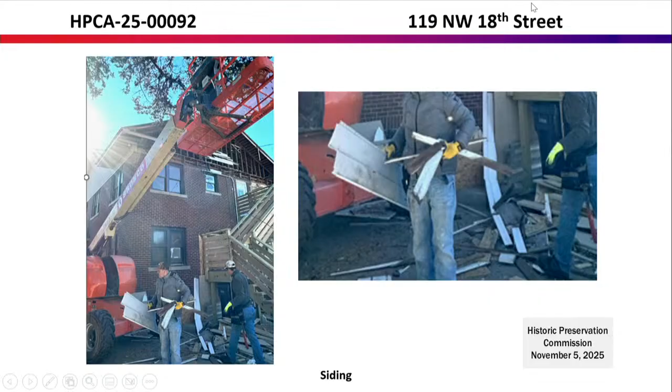Angela, correct me if I'm wrong. I think we have what we need as far as what they are requesting. It's just that it's not a product that the guidelines support. Okay.

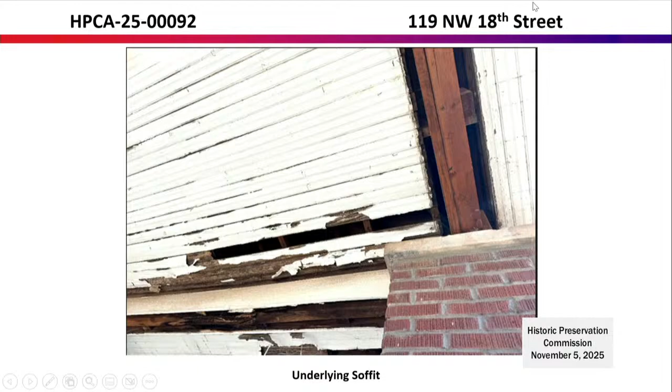If I could speak, Shelley Taft, same address. Initially we didn't have the photographs of the underlying material, and we obtained those from our contractor, and a different product was used. We did supply some photographs of our neighbor's home, opposed to our gables in the same photograph. We just feel like what was used was compatible and similar. At the time, because of the whole CA process, we did not know what could be used, but I feel like from the street side it's very comparable to what is being used in the neighborhood.

So, Katie, because generally the removal of vinyl is encouraged, maybe, I don't know. But had this been done before and it was recommended or requested to take the vinyl off and replace it, and what was under it was not original lapboard siding, what product would the guidelines recommend?

So the guidelines say that if, presumably on a house where there was siding, that product, based on the age of that house, would have been wood siding. These other later materials wouldn't have been the original fabric, even if that's what we find today. So the guidelines would say that when you're replacing siding, you need to go back with wood siding on the historic structure. There are some allowances for fiber cement siding in non-visible locations on the rear of the structure. But generally speaking, if it's in a visible location and if we believe it would have been wood siding originally, then the guidelines say you go back with wood.

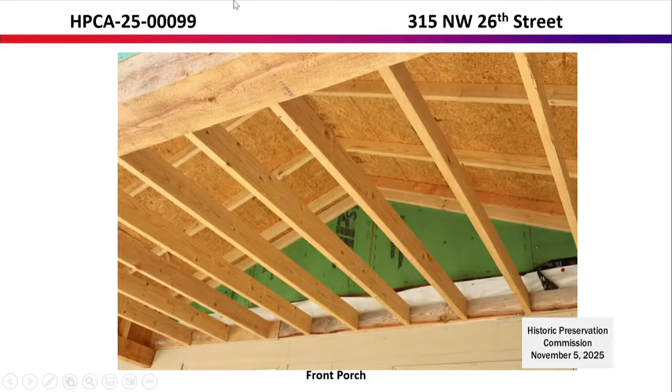And Angela, do we have documentation of what the original columns were on the front? Is that the photo from 2007? Yes, I think we've got a photo in your packet here. Hang on, I'm getting there. Yeah, page one, there you go, the photo history.

So what's shown in the drawings, the columns, do not match what is originally there. Are you willing to match the original column features? Yes, so I redid the new plan and sent it to her with the new columns, and I redid the siding and redid all the existing windows to code, to match the original of the house.

Okay, so it sounds like we might have made some progress here, and we just got the materials too late for them to be incorporated for this meeting. What I would say is we could continue this to the December 3rd meeting, and there may be some items we can administratively approve in the meantime. Like rebuilding columns to match the existing is something we can do administratively, for example. So we can work with the applicant between now and the next meeting on those things. Do you follow?

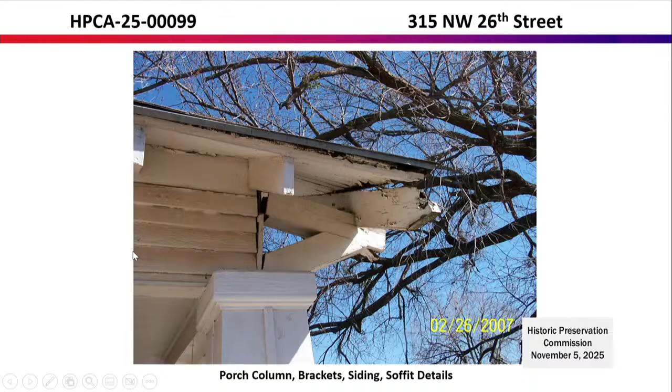Okay, since we can't see all of that revised information, we're probably going to make a motion to continue. But staff might be able to look some of those over and approve some items before you have to come back, so we might narrow those items down. I just want to be clear, we don't have the most up-to-date info, right? Angela, is that correct? Right. Okay, and I assume you'd want to come back at the first opportunity, yes.

December 3rd? Yes, and what about the concrete? And it was there already? There's a new driveway and a new fence that are more expansive compared to what was there previously.

Once the work began, that driveway was installed and the fence was installed. Initially it was believed the fence was on the same plane as the neighbor to the west, but it is not, it is forward of it. And I do need your opinion, since I cannot administratively approve a driveway that exceeds 10 feet in width where there was none previously, and I cannot administratively approve the location of the existing fence.

Do we know how wide the new driveway is? I do not. But you're saying that driveway is five years old? Everything that has happened to this house is approximately five years old, except for those items that have had continuous work to them since then.

This was initiated by the citation process, unfortunately. On the new plans, I have the fence moved back. We can move the fence back. Okay, so I can work on that. Are you okay with us making a motion to continue to the December meeting?

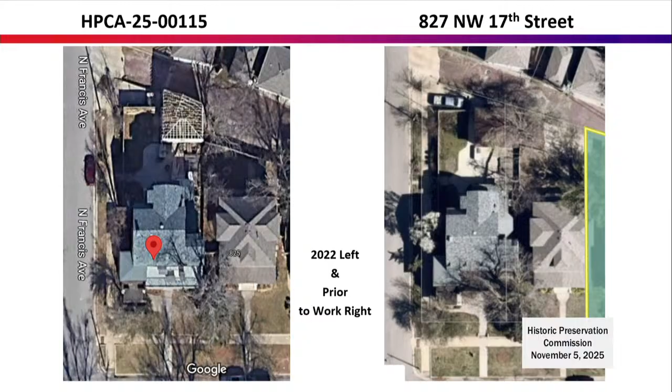Okay, yeah, this house is very old, and it was built prior to most of the other structures. So it's reduced in size, and we're kind of pinched down. But as you can see, almost none of these homes that face 17th have driveways. Most of them enter off the rear. Like you can see just adjacent, that whole back 18 feet is just paved all the way across for parking.

So it's very unique. The very last house on this row, you can see their accessory structure is 2 feet from the back of their house, and it's a 2-story. It's actually not even a garage, it's just a 2-story structure that sits back there. And we see on some sites more than one accessory structure. So this is just unlike what we typically see on your 50 by 140 foot lots.

So I would say all of that leads us, and again, you have to remember, they got these demolition CAs intending to replace those structures. Well, to clarify, they didn't get a CA for the demolition. They got a CA to demolish the second building that was built without permits. This building came down with no CA.

Well, I beg your forgiveness, because I was not part of the project at that time. I know, just to clarify. So, Hollie, my concern is the...

Site coverage. Listen, talk to Public Works. There's existing buildings that were standing downtown and now they've been demolished and they're greenfields, and they're making on-site detention requirements. Regardless of the argument of whether or not something at one point stood there and wasn't fully a green site, I think this is just too much coverage.

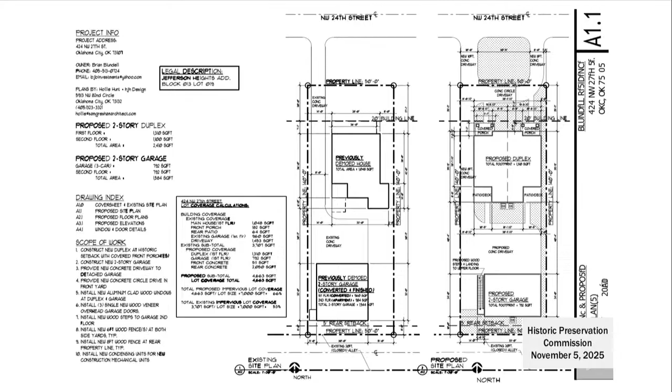Anyone want to comment on the exterior design at all? One thing we combat, being in the middle of a street among a bunch of single-family one-stories, is that compatibility. Before you see it for approval, I'll do a full streetscape so you can see those larger buildings at either end, at either intersection, as well as how we compare to the bungalows beside it. That's the reason for doing a one-story porch that projects, but is still set back according to the building line. So even that one-story structure is behind the 25-foot setbacks. We're not projecting out into the street.

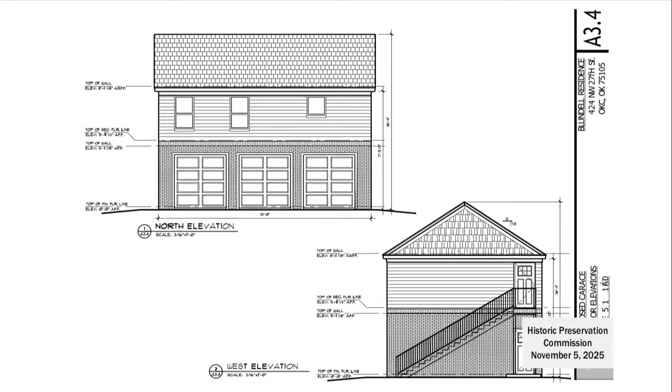So we hit you with the one story and then it grows. I've also oriented the roof structure to slope away from the street, so it doesn't have this massive view from the street. I've pushed it back as far as I can. On the front we've got some more architectural features, some knee brackets and so forth, and those have been removed on the rear.

To my architect friends on the horseshoe, the height—that was my question. So you have the height labeled on the garage, but not on the primary structure. Do you know what the height of that is?

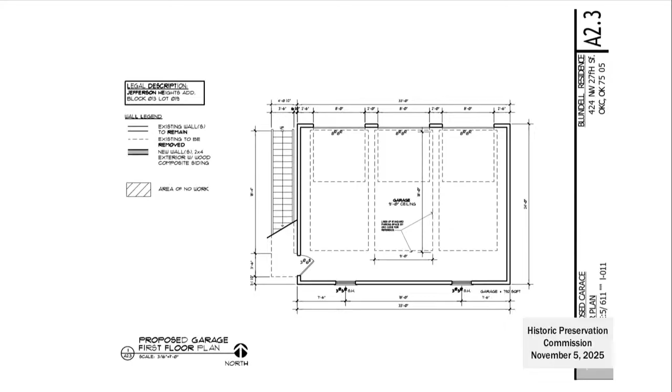So let's see if that's... and what about the roof height too on the primary? Does it seem really large or no? 22 to 23. Well, you have 26'4" on your ADU, so I'm assuming that's not taller than your duplex. I'm just kind of... 21 feet, and then whatever the roof adds to 21 feet.

If I was on the spot I could probably do that math in my head, but right now, let's just look at when you... Sure, certainly. It looks like 21 feet's the top plate of the second floor, and then whatever your roof pitch is.

So I think you're gonna be under, I think 35 feet is the zoning requirement? Certainly, that's the requirement, and that's outlined in the spec. But I see what you're getting at, let's make sure that the garage isn't competing with the main building. It needs to feel secondary, regardless of what that footprint ends up being.

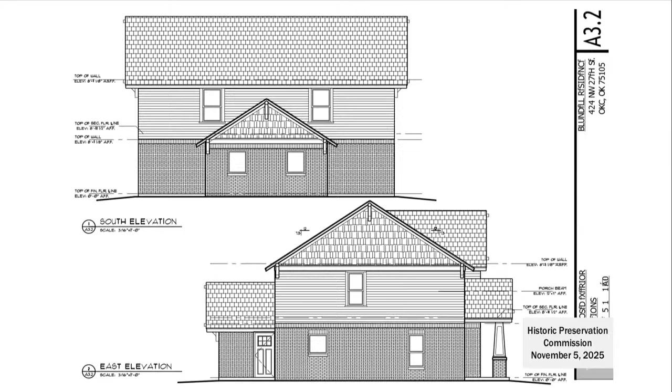And then another question I had, because I was looking at the elevation, the east elevation of the ADU, that elevation shows no windows on it, but your plan shows a second floor window.

Yeah, that's just me messing up, the shower. Thanks for pointing that out, I'll make sure and get that on there. Again, we were rushed to get to Board of Adjustment, and they really just need the site plan, but because this is historic, I wanted to get as much information to Katie as possible, so I was putting the right things into the SPUD. So that's an oversight, Commissioner Whitley, I'll get that fixed before you guys see this for approval.

My comment is going to be, I don't love a blank elevation entirely, I know y'all hate that. If it has a window, great. Yeah, so I'll make sure and do that.

Another thing I would mention is I've got some divided light on the front of the house. We removed those for the rest of the windows, even on the main structure. Again, it's just a way to minimize pastiche, or trying to borrow from the past, but if that's something that stands out to you all, I'm certainly willing to do more elaborate windows.

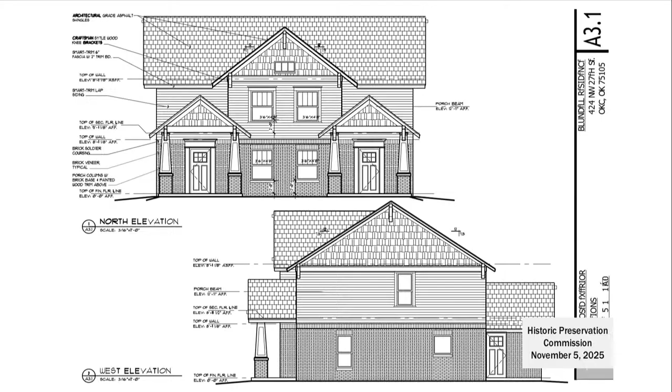And then the one other thing I wanted to mention is privacy. A lot of times with multifamily on a single family street, people are concerned about privacy, and I just wanted to point out that there are no upper floor windows that look into the side yards. The only side windows on the second floor are into the stairwell. So all windows go either to the front yard or to the backyard.

So that's something I just wanted to point out, it was brought up when we discussed the SPUD for privacy, so there's no need for obscuring glass and things that the Board of Adjustment like us to do on second floor. That doesn't bother me, air rights are... I don't have an issue with privacy.

So I would say I hope you did consider in your SPUD what your parking requirements are, because I would hate for it to come back and you try to tell us, well, we have to put 6 spaces on here because that's how it was written in the SPUD. You can always add more than what's required, but don't put yourself in a tough position where you're going to end up eating a lot of site, and then you have to go back and either revise it or you can't get it through.

I will tell you that that was a conversation, and specifically we wrote into the SPUD to allow the garage parking to count towards our parking, which wouldn't otherwise without that distinguishing statement, because as Katie mentioned, garages do not count towards your parking for whatever reason.

Yeah, I think she was just saying that you could theoretically propose 0 parking requirements and then do whatever you want. Do you expect them to approve that? And especially, the neighbors would hate that, like, hey, we're going to provide these 6 units, we're not proposing that. It's okay.

Right, okay, so I'm trying to get right in the middle, I did a lot of 1.5 and the garage. I will, on the topic of the privacy and the windows on the side, because this is something that comes up with Planning Commission.

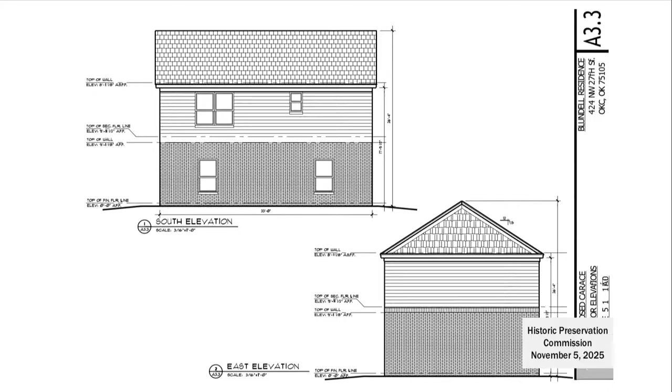But if you're going to do that, some things that jump out at me that maybe need to go farther: most houses with this type of detailing usually sit higher up off the grade. This is a slab on grade, so everything feels compressed down. There are some minor inconsistencies like that, just something to look at.

I think it gets built, it's very nice. So I'm not trying to tell you you'd be okay with a taller building. You have up to 35 feet. My house is taller than this, but it sits 2 feet off the grade.

Again, this is modest, you can see my plate heights are only 9-foot ceilings, down and up. Maybe that's something to look at. My point is, right now it feels like it's in a very well-done, cost-effective middle ground that is trying to look historic.

I think it could either go one way, or it could have some minor detailing. For instance, I made the mistake of building my house 2 feet off the grade, not realizing I didn't have to. That requires custom formwork, which is very expensive. But you could still do an 18-inch off grade, which is a standard form. So there are some minor things that wouldn't cost more money that might make it pull off more historic, if that's what you're going for.

If you're not going for historic, then that's fine too. This is HL, which is not as extreme as how we address things in Heritage Hills, Mesta Park, and Crown Heights, which I'm more used to working in. Jefferson Park is kind of our neat little cousin that has such a variety of construction and multifamily homes, so I'm just getting used to it, but I appreciate that point.